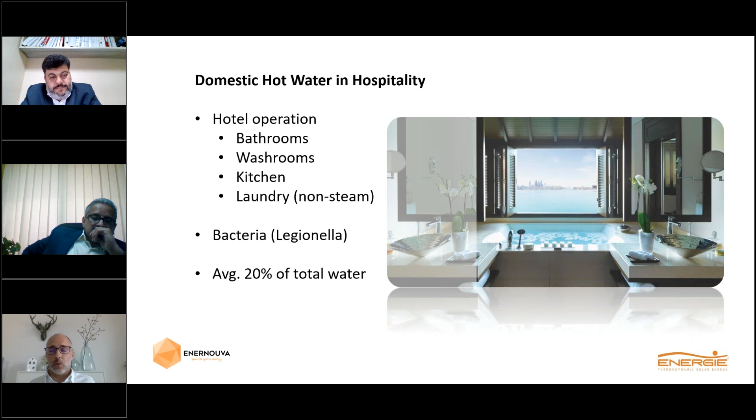Even more important, it can generate bacteria if the temperature is not met properly. All the water in the circuit has to be more than 50 degrees in the last point. And to give you an idea of the importance of hot water, it normally stands for 20% of total water consumption in a hospitality property.

So normally, to produce this water, the traditional heat sources are used. I mean, electrical heaters or calorifiers, boilers, being diesel, LPG, SNG, or natural gas. And these technologies are used because they can give, on the design stage, enough thermal power to achieve the hot water demand at the same time as the temperature that is required.

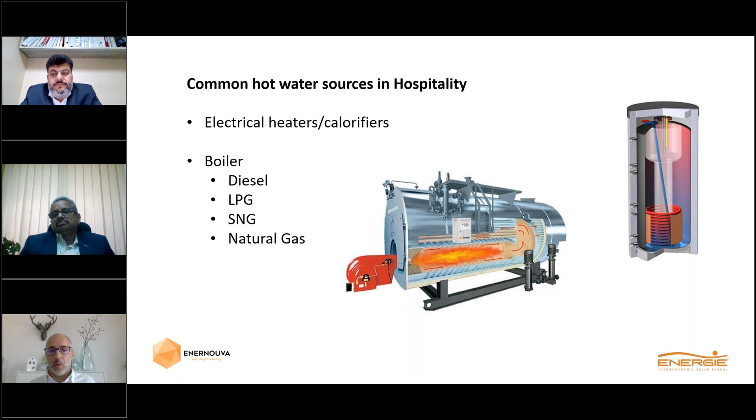So why retrofit? You know that the design stage is done prior to the hotel opening, and then the operator will come to explore the property, and the engineering team will do their best to optimize the operations, to reduce the operational costs, and to make energy efficiency initiatives. So if they have electrical heaters or calorifiers, then the problems are the following.

First of all, electrical heating is the least efficient way of heating water in the world. To give you an idea, with a new heater, for each kilowatt that it consumes, only 85% to 86% will go to thermal load. There will be a heat transfer loss. And then every year, due, for example, to calcification of the heaters, the efficiency will drop.

Then they have a very high operational cost. I will give the example of Dubai. We have 44 fils per kilowatt hour, which is one of the highest rates in the Gulf area, but still very, very far from Europe, for example. And it makes it around 15% of the electrical bill. Then there is high maintenance on the electrical heaters and a high replacement ratio. Normally heaters are replaced every 3 to 5 years.

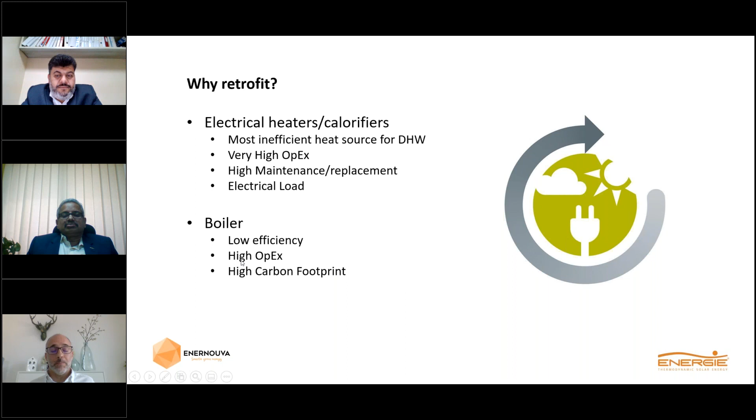And the future, of course, is not traditional based technologies. Then we have the green corporate strategies and the CSR. Most of the top brands in hospitality have guidelines, and every operator should suggest and implement every year strategies to be more energy efficient, and of course hot water is one of them.

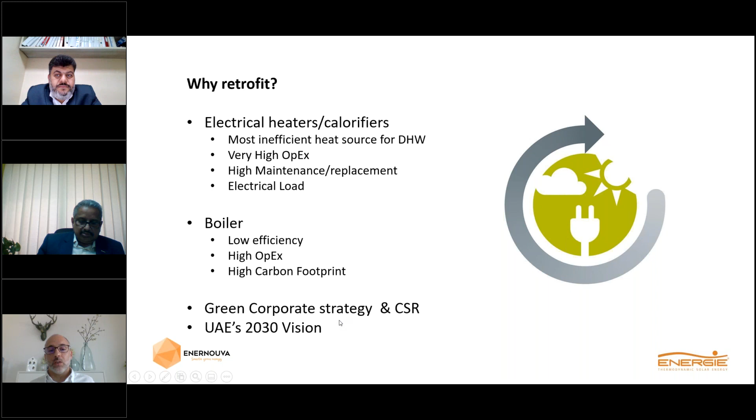And finally, even the country has its own vision of where they want to be in, let's say, 10 years' time, actually 9 years' time, and renewable energies need to gain more weight in the total demand of the country.

So for alternatives, we normally think about renewable energies, and the first one that normally comes to mind is solar thermal panels. Solar thermal panels have the advantage of a very low operational cost, and they have a very good performance. The disadvantage is that they have a space constraint. They require a large and vast area to be implemented. And as you know, space is a commodity.

For example, in the big cities, the rooftops are completely constrained because of the HVAC systems. Ground floors will not be used due to the cost of the square meter on the ground floor. So that's why there is no hospitality property that is doing 100% of their demand using solar thermal panels. Normally they target 10, 20% at most.

Then they have a limited operation. In this part of the world, we are actually very, very lucky to have 10 to 13 hours of sunlight per day, but solar thermal panels cannot operate during the night. So normally they require a backup, which typically is a traditional electrical heater. So again, the least efficient system to heat water. The combination of the two really brings the efficiency of the overall solution down.

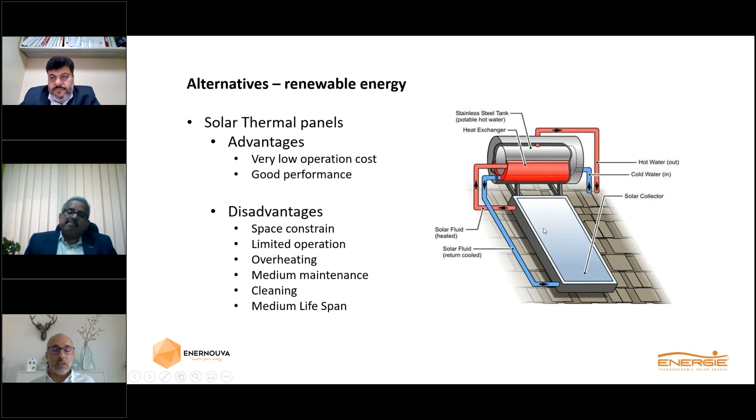Then there is the option of the heat pumps. The heat pumps have a medium-low operational cost, so they consume more to operate than a solar thermal panel, and they have a decent performance. I mean, they are less performant than solar thermal panels, but still, compared with boilers, they have a higher COP. So the big advantage here is that it's a standalone system, so it can operate during day and night, and that's the big advantage compared with solar thermal.

The disadvantage is it requires high maintenance, especially on the evaporator. In this part of the world, a lot of dust will accumulate on the evaporator, and it has to be cleaned regularly. Also, the lifespan is low, so these units, especially the air to water heat pumps, due to the dust, but also due to the salty environment of the Gulf and the high humidity levels in summer, will have a lower lifespan.

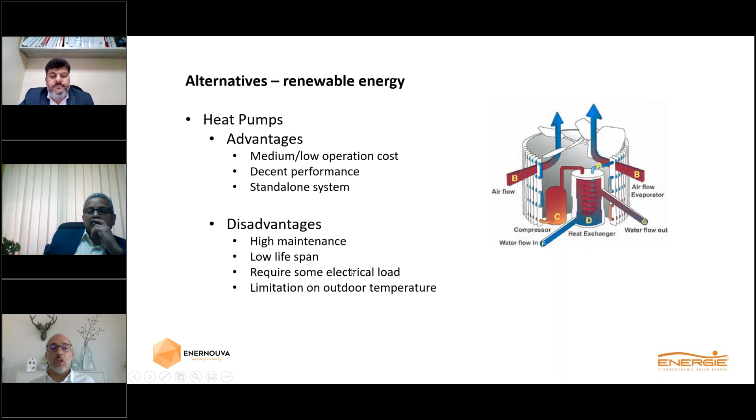For example, a heat pump without any maintenance would last 3 years, up to, let's say, 9-10 years at most. Then it still requires a decent amount of energy to work, and it has a limitation of the outdoor temperature. So if in summer the outdoor temperature is higher, let's say 46, 48 degrees, the heat pumps will suffer. They will start doing cycles and restarting, consuming more, and not operating as well as they should.

So the option that we bring you is the thermodynamic solar. Thermodynamic solar is actually a hybrid solution that combines the advantages of the solar thermal panels and the heat pumps together. So we produce hot water using the sun radiance and the heat of the elements, everything that we can take out of the environment to put in the water. So like that, we can provide more hot water using less storage capacity, less panels, less space, all days of the year, no matter if it's sunny, cloudy, dusty, or even during night.

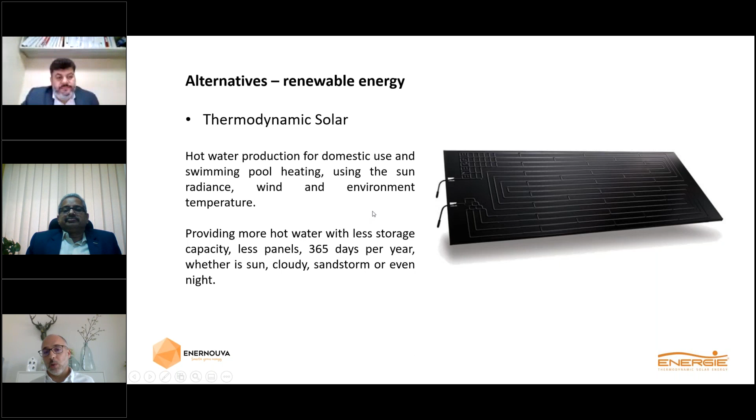What we require to operate is that the outside temperature is more than 0 degrees. If it is, and of course in this part of the globe it's always more than 0, we can provide hot water at 60 degrees in a standalone system.

So what are the advantages? First of all, we are high performance. This means that we can produce at least 66% more hot water per panel than a top European-made solar thermal panel, and we have a better COP than any heat pump in the world. Then we don't overheat, so our panels can withstand 120 degrees. We are fully protected from corrosion, so we don't suffer like heat pumps and solar thermal panels, because our panels are made of anodized aluminum with a certified marine coating, so we are not vulnerable to corrosion.

Then we don't need to clean the panels because we are not using the sunlight, we are using the sun radiance and the heat, and we tested this in multiple projects. Then we don't do maintenance on the panels. We do maintenance on the refrigerant circuit and on the tanks by replacing, for example, the magnesium anodes.

Then our game changer is actually the space that we use. We need 80% less space than traditional solar. And why? Because we don't need to respect orientation or inclination like traditional solar panels. So we can place them from 10 degrees to 90 degrees. We can face any orientation, even north, and then we can stack them 30 centimeters apart, and we can have multiple levels. We can have up to 4 levels.

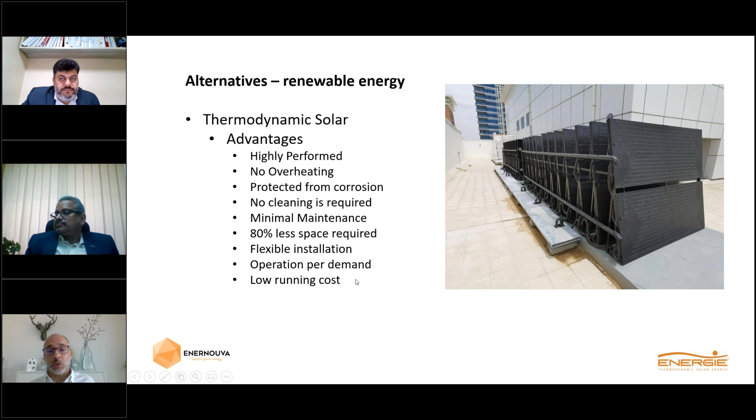Finally, we have a low running cost. Actually, we are the cheapest way of producing hot water in this part of the globe. We are 90 to 92% less expensive on operational cost than electrical heaters, 80 to 85% comparing with boilers, 35 to 40% comparing with heat pumps, and compared with traditional solar because of the backup.

So how does it work? This is a schematic for one of our modules. Inside our solar panels, we are not using water like the traditional panels - we are using refrigerant fluid. Why? Because we can get much more from the environment using a liquid that boils at minus 46.7 degrees rather than water that boils at plus 100 degrees. So the liquid will go in negative temperatures into the panel.

It will evaporate using the sun's radiance and heat, comes out as vapor, being pulled by a compressor inside our solar block, which compresses up to 28 bars, rising the temperature up to 72 degrees. Then it goes into a main heat exchanger located on the output tank, where we do the main heat transfer. Then the remaining energy will go to a secondary heat exchange, so we can use the available energy more efficiently.

Then the vapor will go back into the solar block, passing through an expansion valve that reduces pressure and temperature, and going back in a closed loop into the panels. You never have to refill it because you are not spending the gas, you're just transporting the energy. So we are passing from liquid to vapor and the other way around, and from low pressure to high pressure and the other way around.

Then the cycle will go on until we meet the set point. Then the system stops exactly like an AC, and then it will restart on a delta T that you can choose from. Then we have the hydraulic line, the cold water line, the hot water return line, the preheated line, and the supply line.

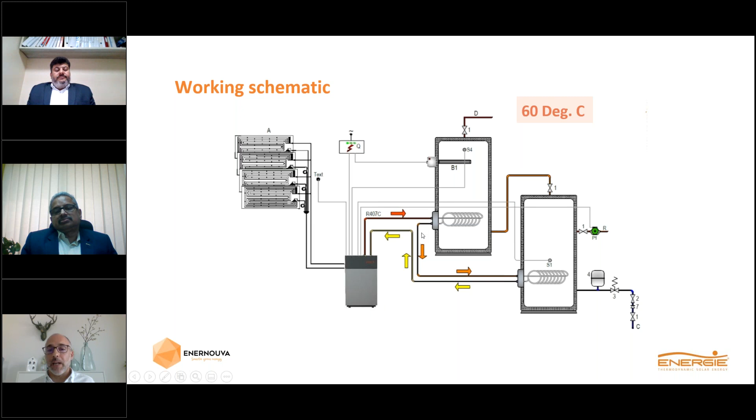Our biggest module can produce with 32 to 40 panels and one compressor, up to 15,000 liters of hot water per day with 2 peaks as per hospitality demand. Then if you require more demand, we just have to add systems to work in parallel and connect them into a main header.

A very interesting feature of our system is our monitoring. On our big systems, on our domestic hot water large volume systems, we have a built-in monitoring system. The idea of this monitoring system is transparency in 3 levels. First of all, we want clients to know that we are delivering what we promise. We don't base ourselves on data sheets, we base it on real information. So we want to show that we are committed to the numbers we promised in the beginning.

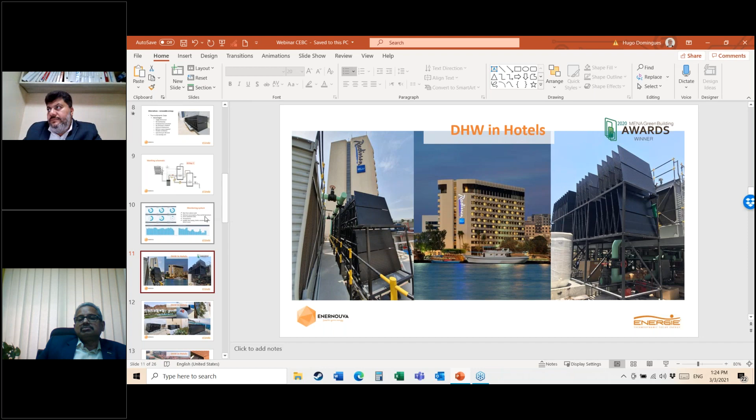Okay. I think we lost Hugo, right? Yeah, I think he lost power. Okay, let's just wait a second and see if he's coming back. Hugo, are you back? Hello, Hugo, we hear you and see you. You are good now, please continue. Hugo, do you hear me? Hello, Hugo, hello? Yes, hi. Sorry, yes, please, I'll go on. We momentarily lost connection, no worries. Please continue, can you hear me now well? Yes, very well. Okay, I imagine you lost me when I was talking about the monitoring system, correct?

Yes. Okay, perfect. So as I was saying, the monitoring system allows us to measure flows, temperatures, and energy consumption, and we can be more transparent to the clients and do a better service in terms of tuning, maintaining, and detecting any issues that will be there.

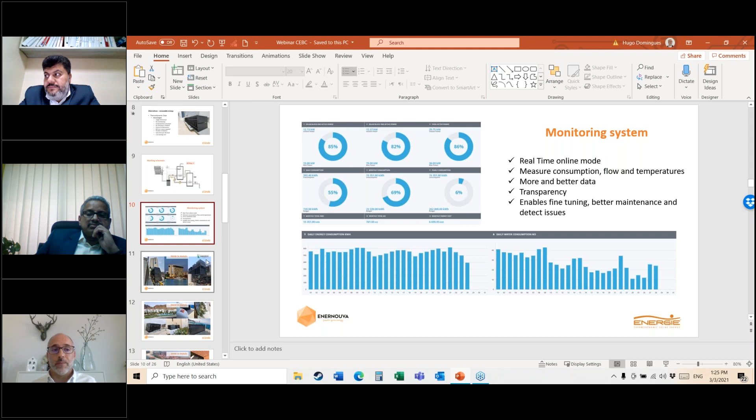So some references for you. This is the Radisson Blu Deira Creek. I will not explain it in depth here because we have Gopakumar with us to explain it a little better. I will just give some insights of the property. This was actually the first 5-star property in Dubai, built in or commissioned in 1975. It was the Intercontinental, then converted to Radisson Blu Deira Creek, with 288 rooms and 10 restaurants.

Here we replaced a diesel boiler by installing 80 panels using only 20 square meters. We installed it like this because we actually wanted to use the collateral cooling. As you know, the thermodynamic cycle has two sides, the heating side and the cooling side. The heating side, which is our main target, is to produce hot water inside the tanks. But the cooling side happens on our panels, our evaporators, where negative temperature liquid passes through the panels, creating ice formations. So the panels are actually producing cooling of 1 kilowatt per panel.

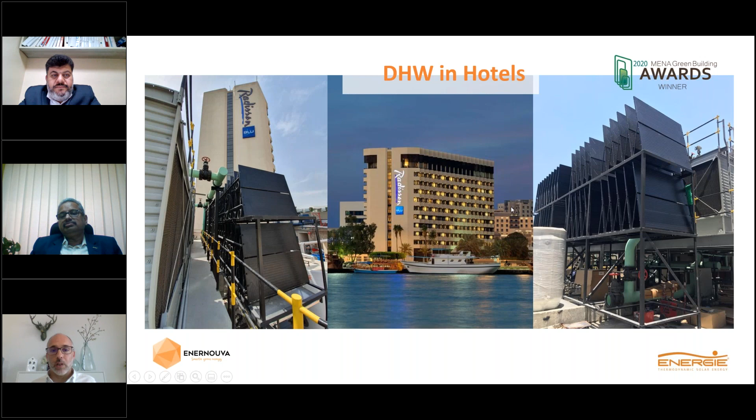So we had 80 kilowatts to use. By putting it in front of the cooling towers, when it pulls the air, it will cool down the air by passing through the panels and entering the cooling tower at a lower temperature, helping the chiller to be more efficient. So this symbiosis was really interesting and allowed us to do more savings and also have a better payback for the client. Anyway, Gopakumar will explain a little more about his property after this presentation.

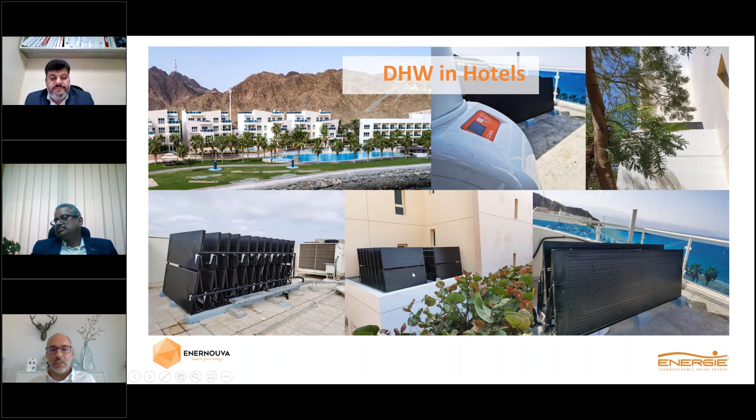So here we have Radisson Blu Fujairah, a different property where you have multiple buildings and each building is centralized. So it's not like the previous installation where one point would serve the whole property. Here you have 9 different buildings, bigger and smaller, with different needs, and we need to target each one of them. You can see some of the installations done in the different buildings. This was commissioned in July '19. We replaced electrical heaters and the savings are near 90%. You can also see from the installations, we try to do it very clean and neat, in case any guests would see it, they would find it interesting.

Another property is the Anantara The Palm. Again, this one is completely different from the previous two, where you have individual installations. So each one of the villas needed to be retrofit, and also the blocks of villas. Due to the architecture of the building, we had to be very careful where to put the panels so we wouldn't affect it too much. You can see some of the pictures. Muhammad, also the area manager for Anantara, will be here to discuss this. We replaced electrical heaters on this property as well, and the savings are around 87%.

Then the first hospitality project we did in the UAE was Radisson Blu Yas Island in Abu Dhabi. You can see 120 panels in only 33 square meters. You can also see in summertime, with temperatures outside more than 45 degrees, the ice formation on the panels, on the inlet of the panels. They switched off the synthetic natural gas boiler in May 2018, and they got their payback 2 years and 3 months afterwards, so that was last year.

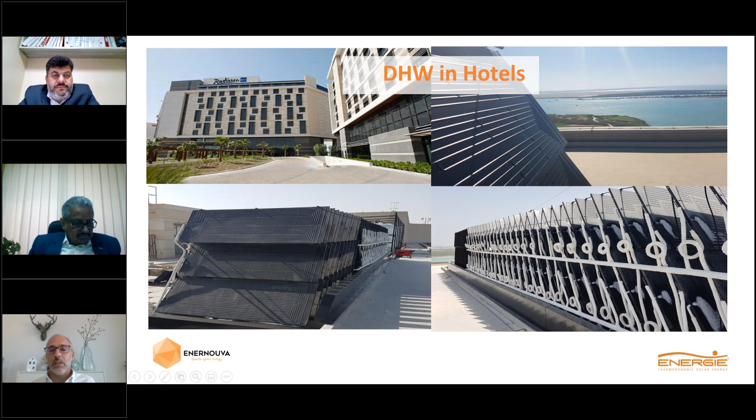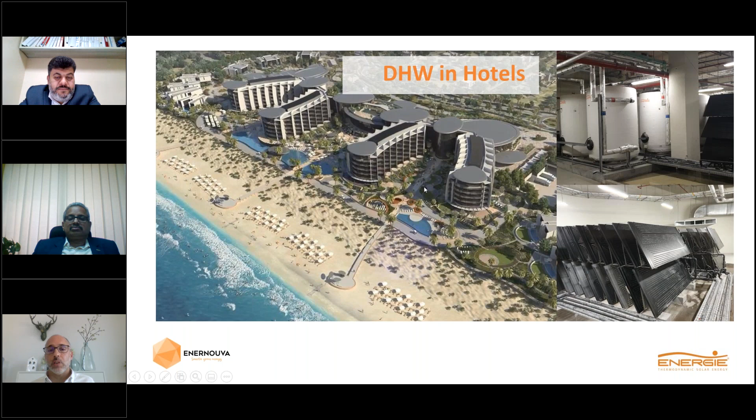Then we did the Jumeirah Saadiyat Island Resort. Here we did something a little outside the box. We installed the panels in the basement without any sun radiance, but to compensate for the lack of radiance, we diverted the exhaust of the laundry to give us enough heat, airflow, and humidity to run the system. So instead of the wasted heat going outside, we are absorbing it and putting it into the water. Here we also replaced a synthetic natural gas boiler. We have 200 panels and we are producing up to 75,000 liters of hot water per day.

Then we have the Fairmont Ajman, commissioned in April last year, also with indoor units. Here we had to oversize the system by 15% in order to cope with the lack of radiance. We are absorbing the heat in the ramp of the basement and putting it into the water. We replaced a diesel boiler here, and we are using the collateral cooling to cool down the parking using the existing ducts, in order to bring more comfort to the guests.

Actually, just a small point on basement installations: the parkings are normally more stable environments than outside. Although there is no sun radiance, you have a maximum of 40 degrees in summer and a minimum of 23 degrees in winter, which is actually much better than nighttime conditions outside during winter.

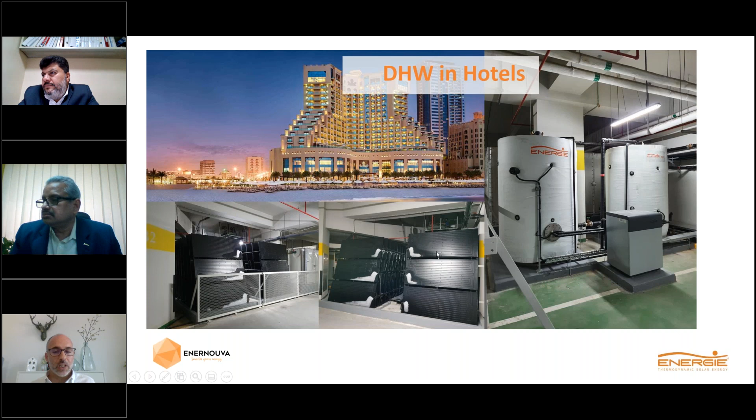So now a quick insight about the retrofit phases that we normally take care of. Of course, the process is much more complex than this, but these are some points to take into consideration.

So first of all, the first phase is the analysis and sizing. We have to go and look for the infrastructure. What is there? How is it done? How is the hot water produced? How are the circuits working?

Then you have to see where we can put the solar panels, where we can put the tanks, how we can connect it. Because in the end of the day, we don't want to change infrastructure. We can optimize it, we can improve it slightly, but if it's working properly, we should not change it, especially in retrofit with an operational hotel.

Then we need to have historical data. Unfortunately, normally in hospitality properties, there are no submeters for hot water. So we need to try to get as accurate as possible to understand the demand of the property. So we get all kinds of historical data, like total water consumption, total electrical consumption, or diesel consumption, or LPG consumption, occupancy levels in terms of rooms, in terms of guests.

And we cross-check, we do some linear regression to try to understand exactly what the hotel needs, to be as accurate as possible, and of course, working always with the engineering team. And that's the next point.

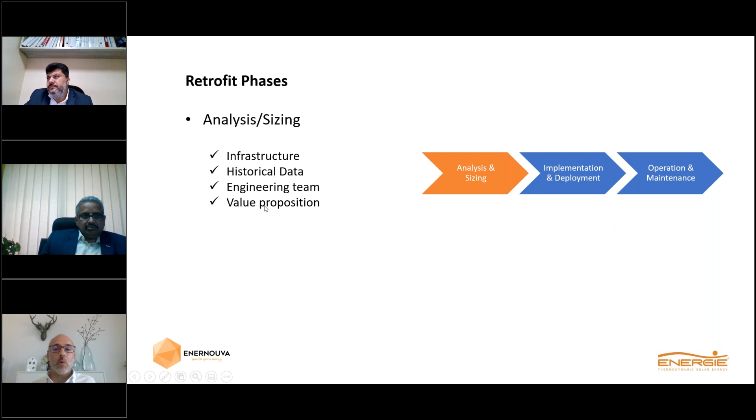And finally, we need to come up with a good value proposition. On the technical side, because we have to meet exactly the demand that is needed from the property in winter conditions, full occupancy, but also in a financial way, to make sense. And right now, an ROI bigger than 3 years doesn't make sense.

The second phase is implementation and deployment. And here, of course, our equipment is top quality, but it's also important to consider the quality of materials and accessories, because you can have the best equipment in the world, but if you are saving on the materials and accessories, then you will create weak links in the circuit.

And that in the end of the day will make you fail. Then we should have a very low impact on operation. These are live operations, and the guests should not feel anything at all about this. So we need to minimize that impact in terms of noise, in terms of work, in terms of bringing materials and logistics into the site.

But also to avoid shutdowns, and when needed, to do it at the proper timing in coordination with the engineering team. The guests should even be warned about that period, and to do it as fast and as well as you can, so that impact will be really minimal.

And finally, to enhance the energy efficiency and lifespan. So the product already brings so much value in terms of energy efficiency, but then you should improve the insulation that is there on the circuit. The system should be protected from the sun, because sun will destroy everything.

You should use collateral cooling if possible. It's not the main target, but any advantages we can take out of it are beneficial. And finally, the hot water return should be optimized. Most of the time, the hot water return cycle is consuming too much energy.

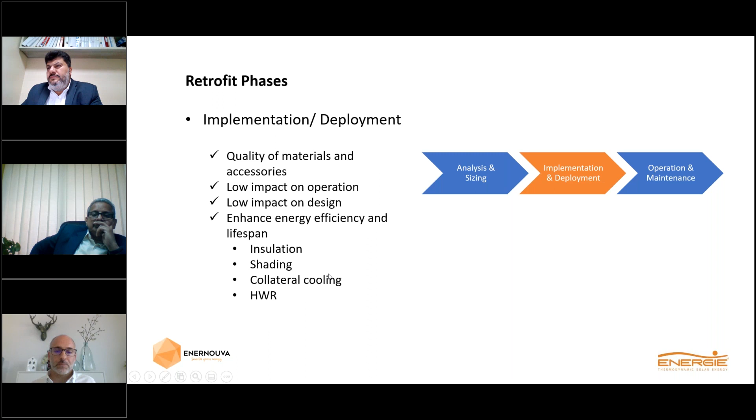Finally, the operation and maintenance. So here we need to do proper tuning on the commissioning and even after that, so the system is running at its full potential.

And we can see that by connecting also our monitoring system. We can know exactly what is going on, what are the needs of the property, and how we can adjust it to be really perfect. The monitoring, as I said before, is extremely important for the operation of the system, and also for the property to feel comfortable and know exactly what is going on.

Then the after-sales service, as you know, in hospitality, has to be fast and good. So again, the guests should not feel any problem, and the monitoring again helps us detect problems before they become real problems, while they are still small issues.

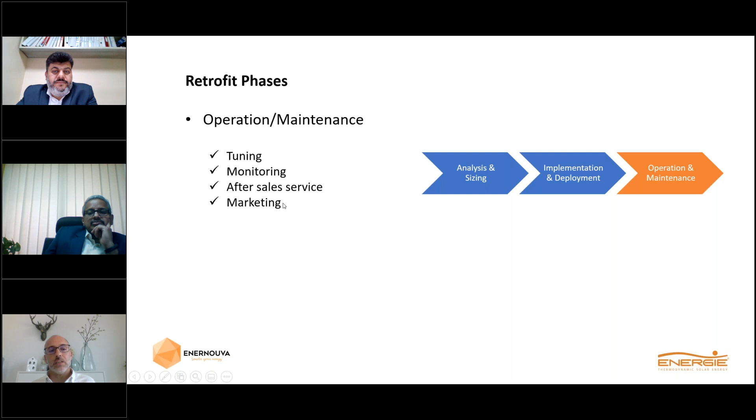And finally, we always try to advise the properties to use this as a marketing tool. So what the properties are doing is actually saving money, but at the same time they are helping the environment, they are helping the planet, and more guests are taking this into consideration when they are making a booking, for example.